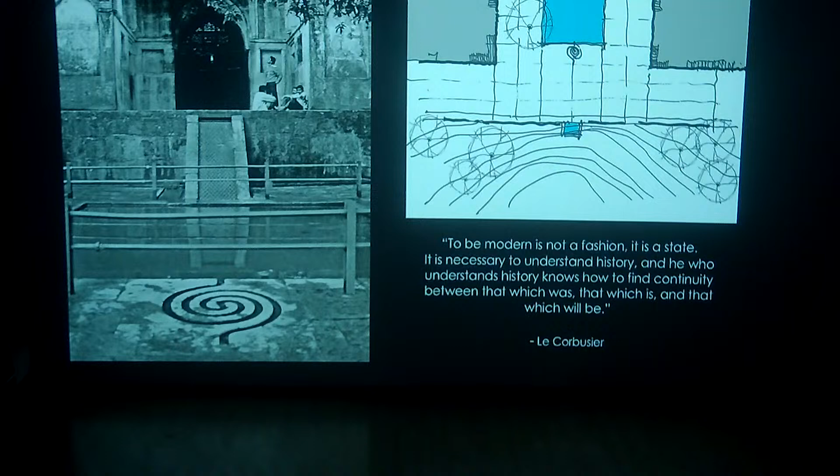This is one of the cases I would like to present, to tell you how a form was decided. I'm going to discuss three different projects. The first is a large mixed-use development, an urban design project called Business Bay and the Ritz-Carlton Hotel - essentially designed as a workplace associated with a 5-star luxury hotel. Then I'll talk about an institute, a precinct within an existing campus - the Indian Institute of Tropical Meteorology. And thirdly, Zostel Panchgani, which was designed by Anubha.

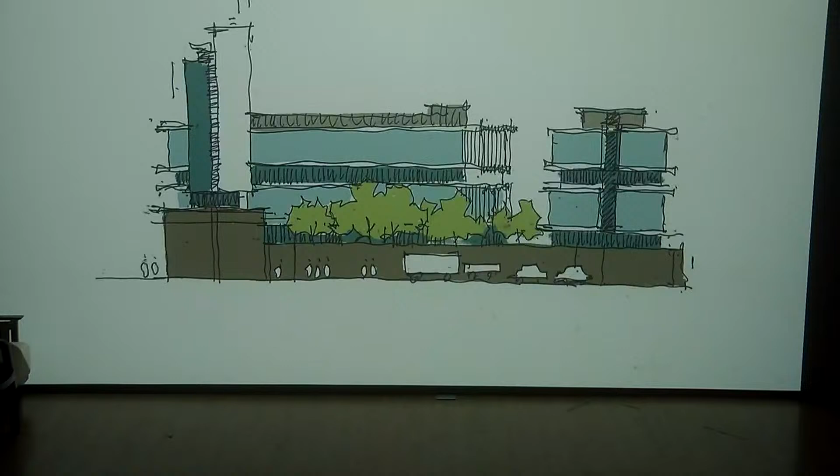Secondly, there was also another important issue: when you're doing such an upmarket workplace, which was supposed to have a very luxurious retail and a luxurious hotel there, the entire footfall here was of a particular economic class. And if you look at the next slide, you'll realize it's situated, surrounded by certain institutional areas, the golf course, and it's juxtaposed with very diverse and contrasting realities of urban life.

And this is a very settled old Yerawada slum and parts of it. So you're actually doing something in the middle of all this context. This can associate with the golf course very much. It can associate with institutional and office buildings very well.

What about this? Normally in the urban design studio, you talk about creating a public realm and create space for people and give it back to the city. But here that notion had to be revisited, because creating a retail which can only survive the economies of this nature had to again be a high-end retail. If I had to put it on the street, or eating places for that matter, which can cater to the working class working in this area, that would have created even greater tension, greater distance between the two socio-economic situations there.

So the response was to remain silent about it, because that's how, as an architect, you can respond to it—not create something just to be a ticking mark of the commonly talked about urban design interventions.

Every time you want to create a public realm, you have to be very conscious about who's the end user of it and what is going to be its social impact. That was another reason one thought a raised podium with a very dead, silent wall could be a better response to that context.

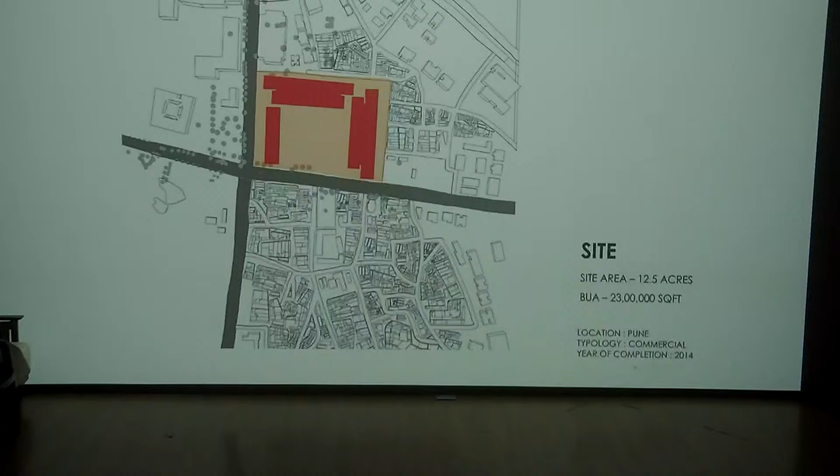But our challenge or our responsibility is the same, when you are asked to design so much, with such a mix of different activities - like the component of hotel was about 6 lakhs, and remaining corporate offices, parking, everything, retail was 17 lakhs.

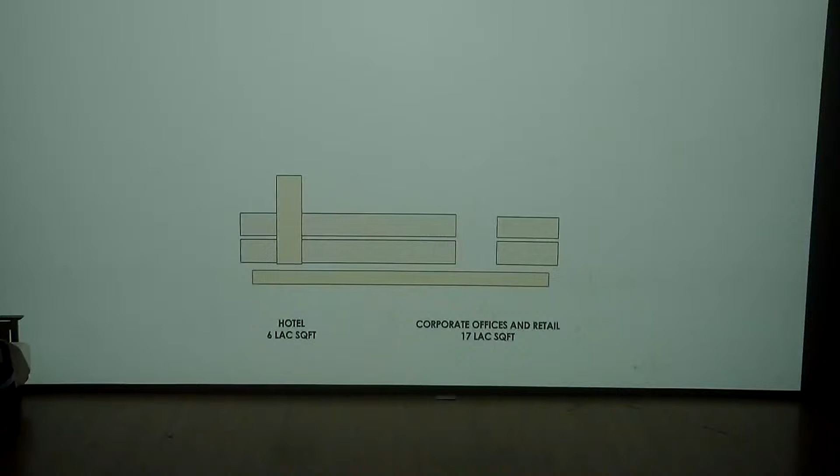So this exercise is the crux of the whole process. Would you like to keep two towers, one as a hotel and this as an office building? That's also a possibility, right? Like what you see in Pune, because the size of plots are like that, you have to go taller in order to achieve the targeted FSI.

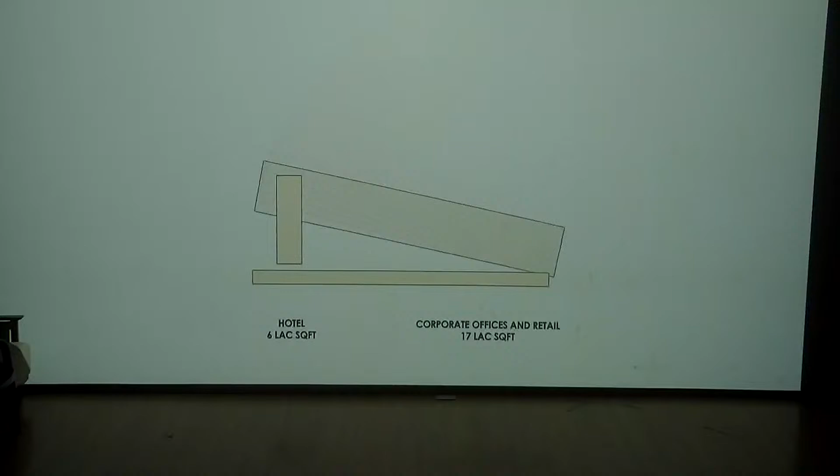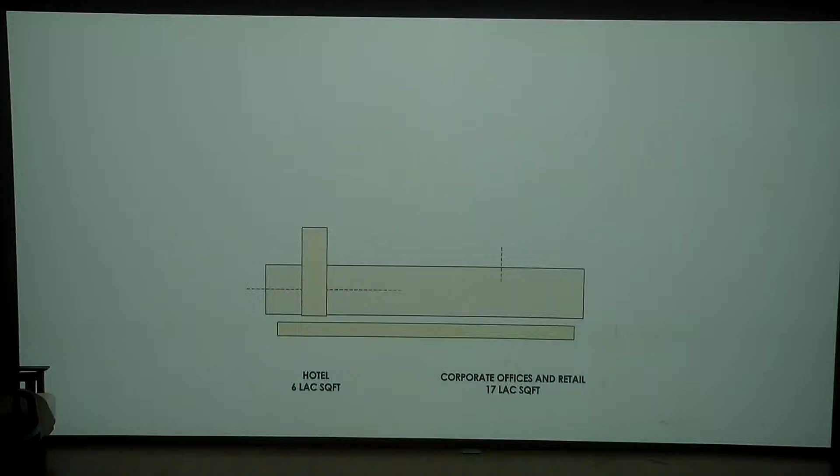But here we took a very conscious decision. The prevailing regulations did not allow us to go beyond certain meters. Then you had airport flying zone restrictions, and most importantly, we wanted to create a place which will look humane instead of intimidating. The landmark can be in two ways - it can just be a tall and very aggressive building, with no limit, just to satisfy the ego of a developer maybe.

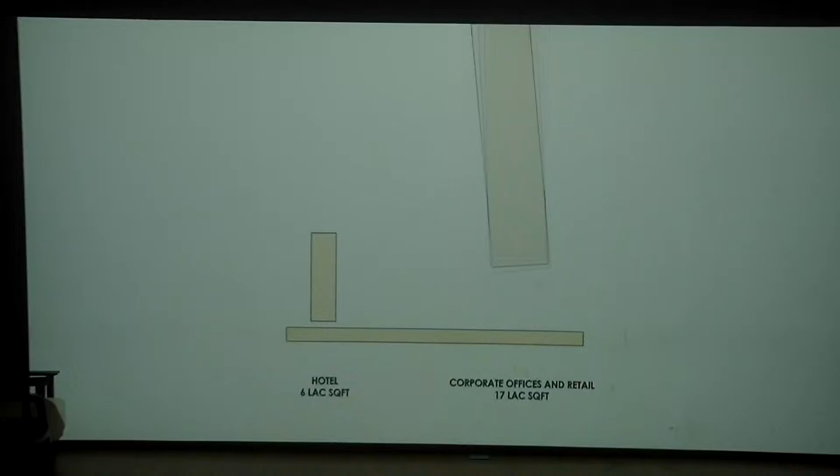But the more sensible way to create a landmark is that it should remain in people's mind - the people who are going to work there and spend their day, whatever 12 hours, 8 hours. So we took a conscious decision to use the same volume in a horizontal manner, so it's very easy on the eye, and it can sort of contain a space.

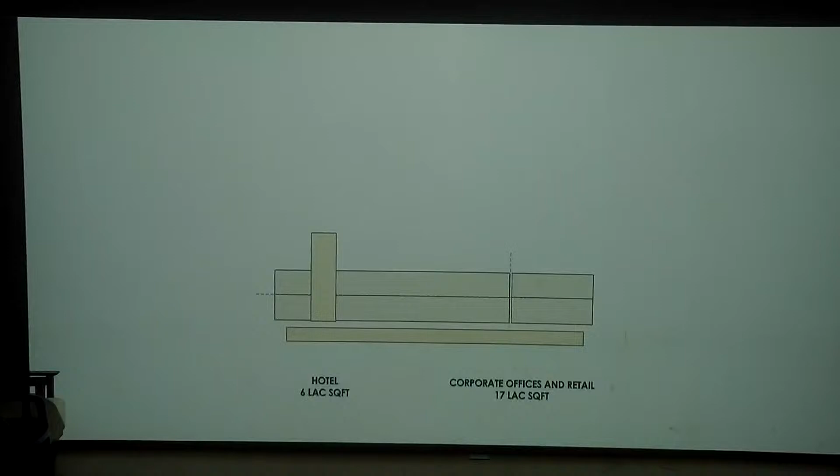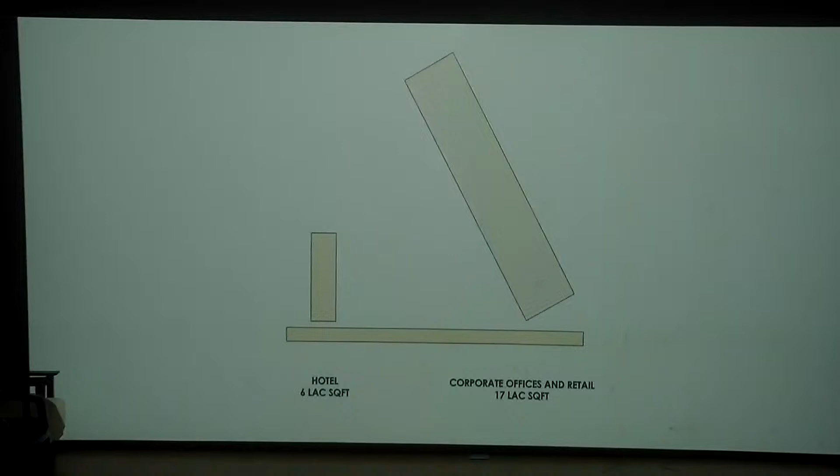Another important agenda was the prominence of the hotel in this entire thing. Actually, if you look at the bulk of these two buildings, the hotel is like one-third of the entire bulk, but finally that was the position the hotel had to take. It had to enjoy that prominence, being that important brand. The workplaces had to be associated with this entire complex, and we wanted them to act as backdrop to the hotel building.

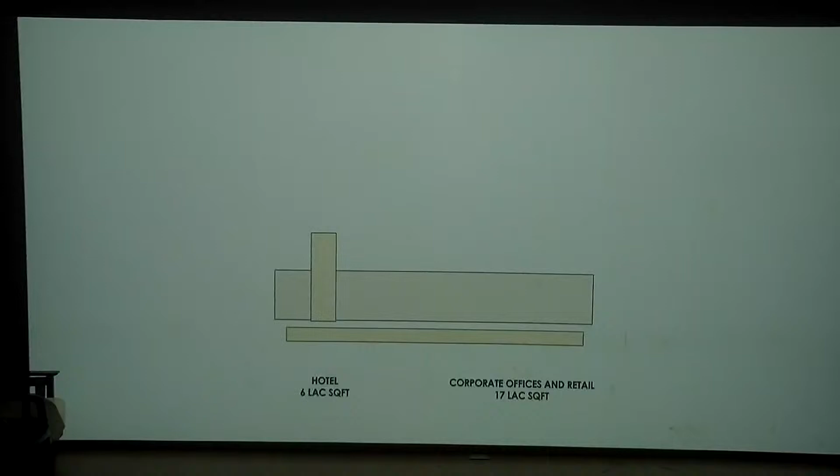You reduce the scale, you give prominence to the hotel, because by its sheer size it's not big enough to create its impact. But by doing the arrangement in a manner that it can achieve everything - that was the task at hand.

And then you start exploring. This exercise is basically about dismantling that.

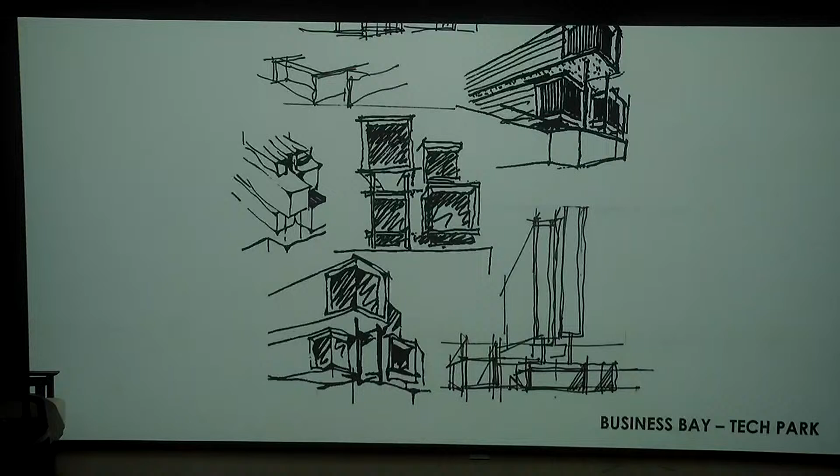And what you can make, and how you can bundle it up, so that the perception about the scale and volume is sort of reduced to a palatable limit.

And then it has to be juxtaposed with a balancing element, like a vertical surface in the form of the hotel eventually. And this was being thought about in 2006.

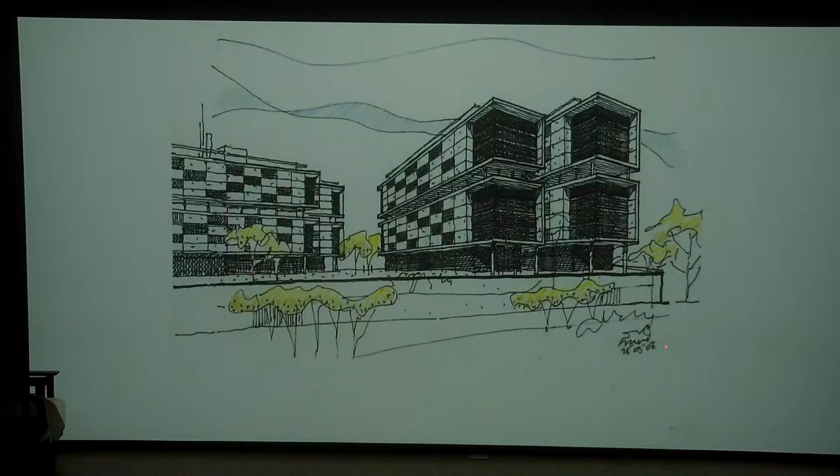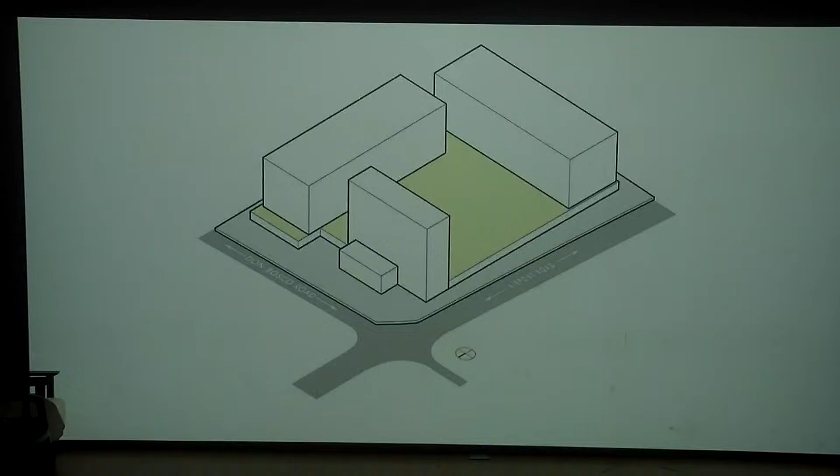The final arrangement is very simple. There's a 4-acre podium landscape garden which binds these three volumes together. These are almost identical offices. There's a plaza and retail planned at the podium level, accessible from the street and in various ways from the parking level.

This is the third level of parking. One level is below ground and two levels are above ground. There's a ramp for the fire engine to access all the buildings. And then, of course, this is a hotel.

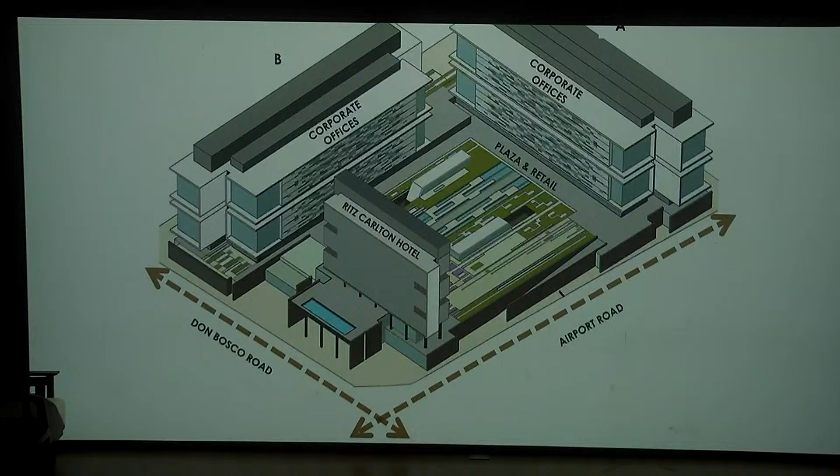I won't dwell too much on the urban design parameters, but in terms of logistics of man and material movement, or vehicular movement, we segregated it into four-wheeler movement and two-wheeler movement. We always talk about conflict between pedestrians and vehicles, but among vehicles there are also categories—heavy vehicles, cars, two-wheelers—so we bifurcated those as well. This render was a result of that.

So this is the 4-acre podium landscape which has a couple of pavilions there, which were supposed to be fine dine pavilions.

Now, hotel, office building, office building. In the earlier sketches you saw, we were trying to bundle up say four floors together to make them look like one entity, so the building looks comprehensible and simple, and you can understand the massing instead of cluttering it with too many possibilities.

And this gap actually provides space for common areas, cafeterias and refuge areas, which becomes very logical for four offices to come down or go up at mid-level and use that common facility, or they can just come for a walk on the podium.

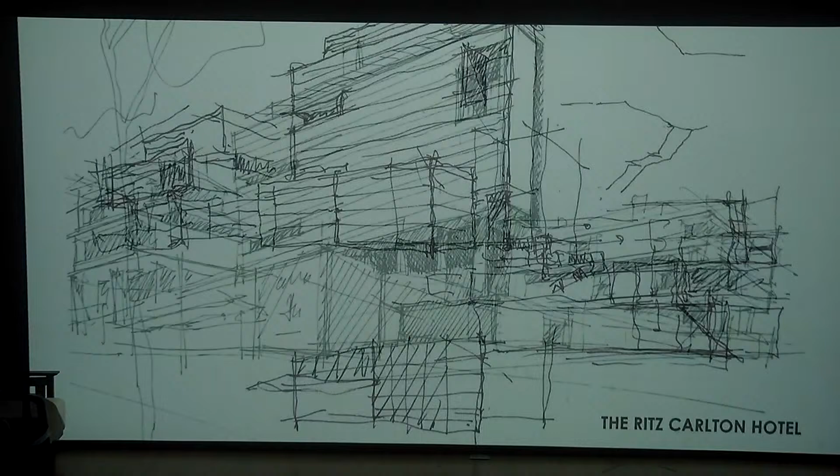Moving on, I split the hotel and the office area separately so you understand. This was part of the same exercise, same flow, but sketches have been presented separately. Here you can see office buildings at the backdrop, and you're exploring how this mass is going to respond. The different arrangement - you can see it's not split yet.

So I was in that process of whether to split it further, stagger it further, and even this had to be staggered. These are scaled down in terms of height, although in terms of sheer building bulk they are thrice this volume. But since this was positioned at the street corner, it was supposed to enjoy that prominence.

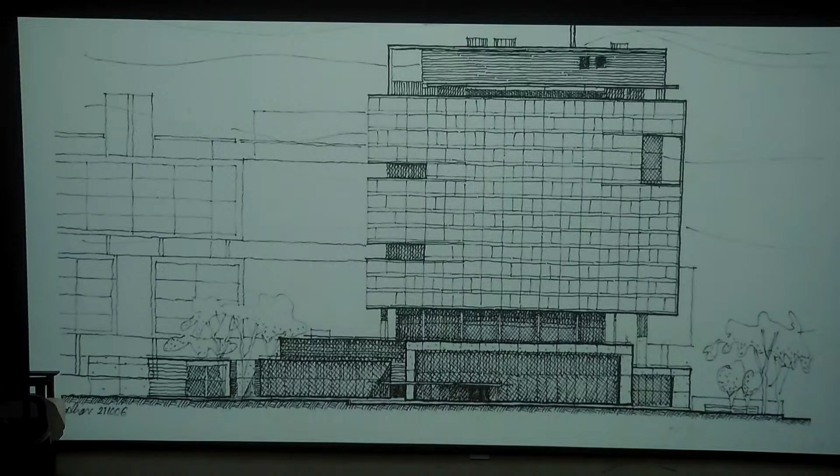Now these are like subconscious or conscious strategies just to balance these lines, juxtaposing them in that overall composition of volumes and masses.

There is a legibility about this form. All these are public areas, and from here you start the guest floors. Material-wise also, there are some MEP areas at the top, but these areas are articulated according to their functional requirement and the connect with the outdoors. Numerous interfaces of different materials and elements come together, and everything has to be resolved in a manner that it looks complete.

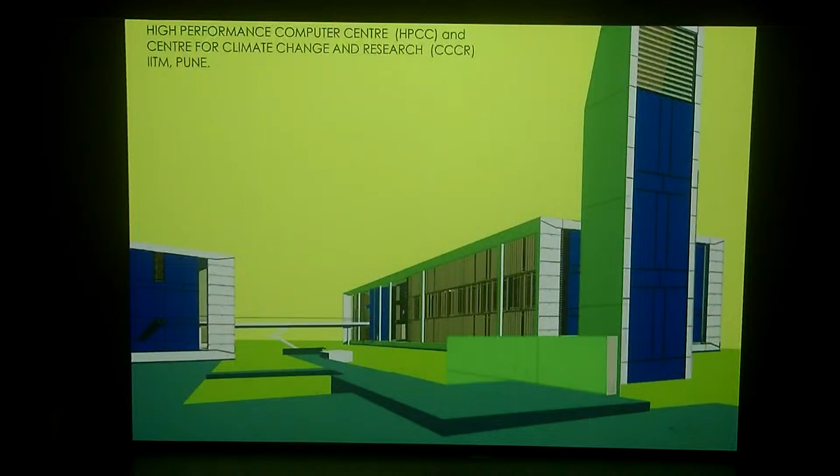Now, I know Kanchan ma'am mentioned about this project: High Performance Computer Center and Center for Climate Change and Research at Indian Institute of Tropical Meteorology, Pune. Here we realized we were supposed to do a master plan for this 50-acre campus, but the master plan was more about infrastructural corrections and facilitating future growth. We were also supposed to design two buildings, which we looked at as a precinct within the existing campus, and that's how the title was coined.

This is like a second-year climatology textbook, everybody has it. When I talk about history, like what Corbusier mentioned, history is this as well, because your understanding about staying in an old mud house in some village, because it has thermal mass, you feel comfortable, you feel warm in winter. A courtyard house facilitates wind movements. All these learnings, I refer to as a history of your learning basically, and there was an opportunity to deploy all that understanding into a project.

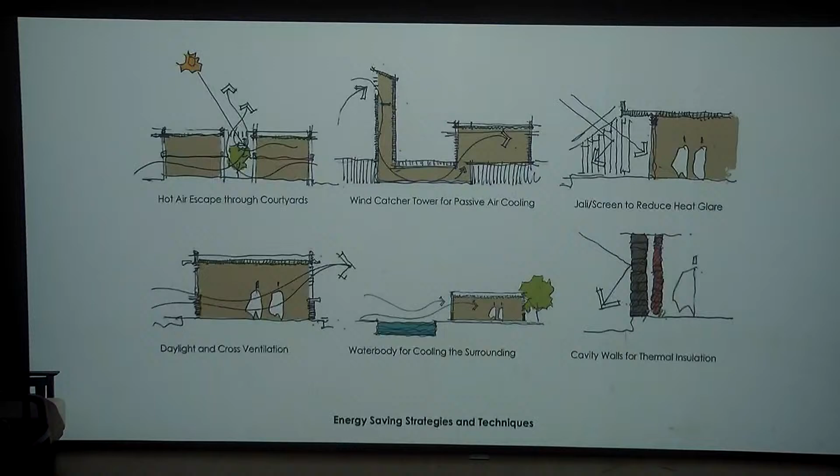A climate consideration or climate-responsive architecture leads to determination of a form, that's another way to approach a form. You don't preconceive it, and the simplest solution could be a simple rectangle if you understand the sun path movement, and probably you would want to respond in the least invasive manner as possible, invasive in the sense of what's around in the context. Here we were lucky to have a very large empty plot, so we could have taken any shape we wanted. Instead of doing self-shading volumes of a close-knit fabric, we decided to deploy certain elements on the envelope of the building to reduce the heat gain.

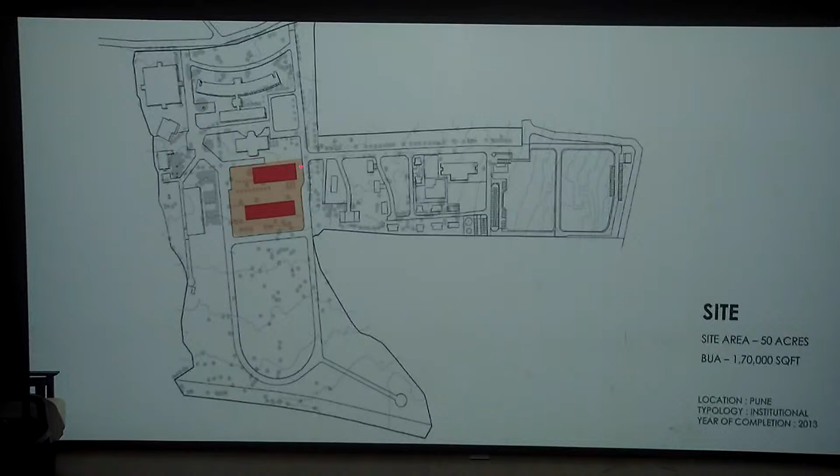So anyway, this was a campus. We did some infrastructural road networks and all that. This is a residential campus. We decided to have two more residential clusters, and then of course this institutional precinct for two new buildings. This was the premise on which the entire architecture was set forth. To me, this is the way everybody should adopt, come what may. The project objectives are that you have to respond to the climate and come up with interesting possibilities.

So here we summarized what this project is all about. I hope you can read it, or let me run through it. The building design of HPCC and CCCR is synthesized from four considerations: converging the formal vocabulary with that of passive climate control. When talking about vocabulary, you are referring to the ultimate expression with respect to its form and architecture, expressing the functional duality as two separate yet unified blocks, because each of these buildings had two distinct functions. One had to be the office areas or research areas, the other a place for housing a supercomputer. Both buildings have similar requirements, but executed for different entities, the different research groups within the institute.

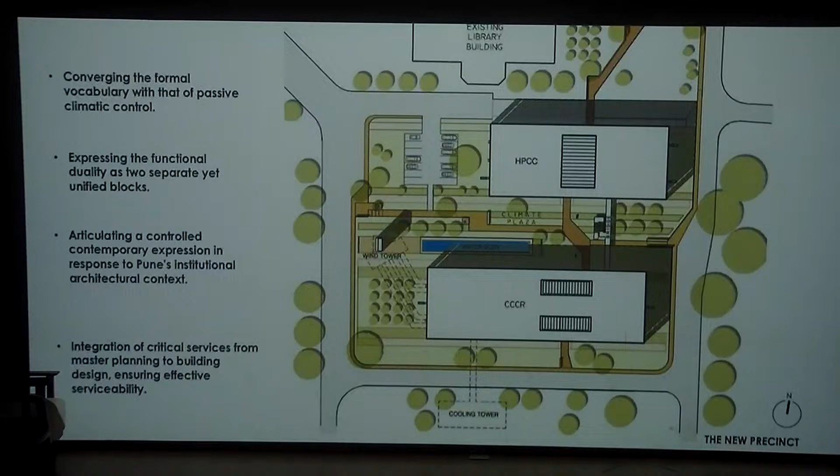Plan the service in a manner that it can be serviceable in times to come. And this building has proven that approach. A 75 teraflop computer hardware was replaced after a few years by some huge capability racks without breaking a single wall. So that redundancy, that planning, that serviceability was designed into the building. And when you call a building institutional, these buildings are supposed to live longer compared to commercial buildings, and they are going to adapt to different, changing requirements. So form is about achieving all that as well.

This is just to continue what Kanchan ma'am must have said, about how to reduce the heat gain by landscaping. So you have to talk about the unbuilt spaces in between, how they need to be looked at also.

Plans are very simple - the courtyards or the arrival. So in this building we realize, on a campus, that a building does not necessarily need to have a front elevation, rear elevation, and side elevation. Because on a campus like this, you can approach the building from any direction.

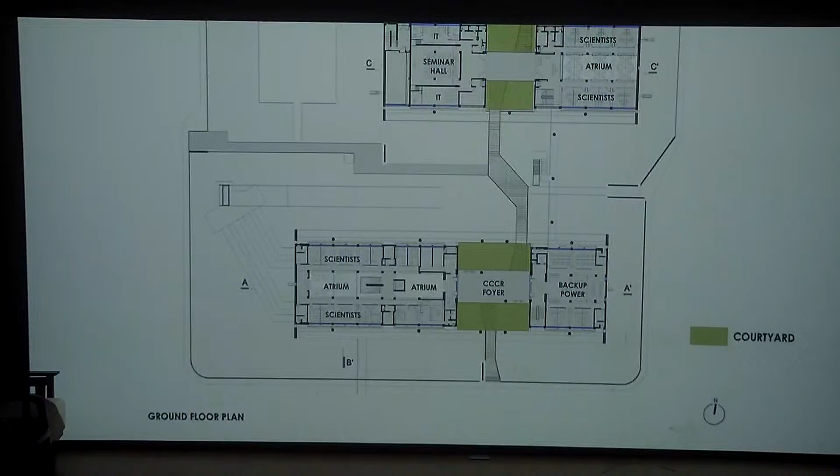If you are coming in from the residential side, you would come from whichever side you are. So the elevation, or the facades, whatever you call it, they have to respond to the climate and which direction it is facing. So here what we did is a simple strategy of adopting a rectangular form in order to reduce heat gain. Why rectangle and why not square? Because a rectangle can give you two shorter sides and two longer sides, and the two shorter sides will be more appropriately oriented towards east and west to reduce heat gain.

The radiation of sun is maximum from east and west, and therefore you want to create shorter walls, and that's how the form started shaping. And then furthermore you can make them cavity walls, add some less usable support areas like toilet blocks, storerooms, and create a thermal buffer to protect the main usable areas.

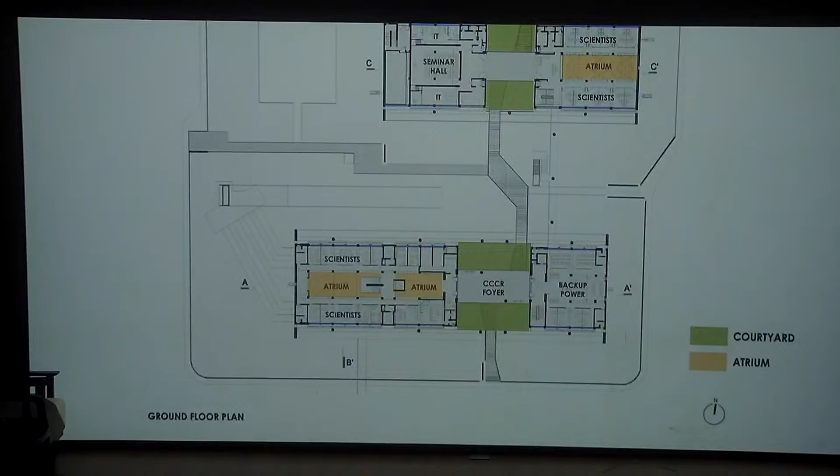So a very simple strategy. If you look at the plan, there is absolute legibility about the entire thing - what's happening. You can understand which are the servant spaces and which are the served spaces, as Louis Kahn would say. And there's an atrium to facilitate cross ventilation.

And these are all the elements which go on the building, created to shade the building facade in order to reduce the heat gain.

One of the buildings we actually also installed with radiant cooling, which was mentioned in the earlier presentation. It has got all the parameters, all the characteristics of solar passive architecture with respect to shading device, orientation and shape. But in addition, we had also deployed what is called radiant cooling and an earth tunnel system in order to supply fresh air.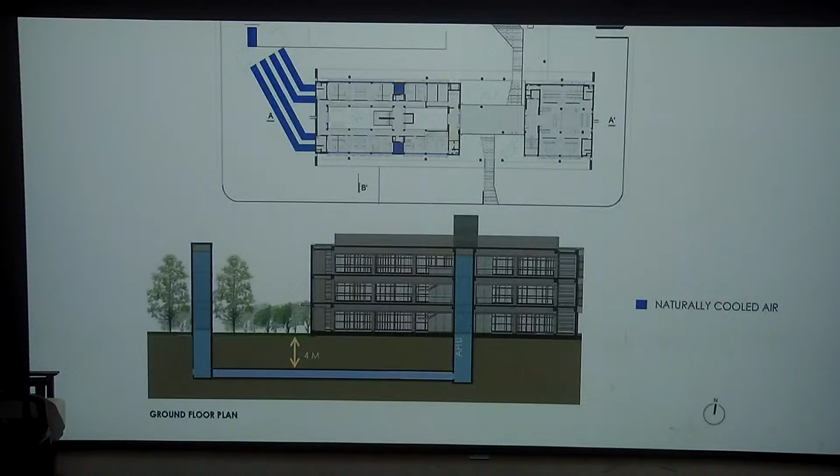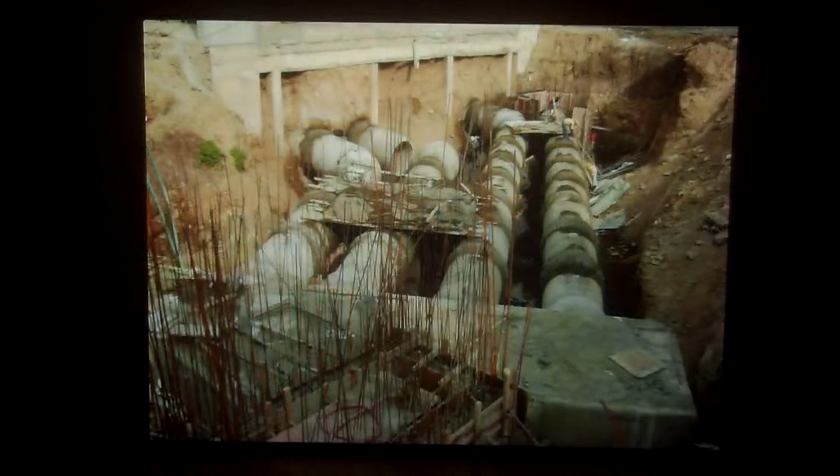And this is how the pre-cooled air is pushed into office areas. So I won't dwell too much on how it is designed. These are radiant cooling pipes embedded into the slabs.

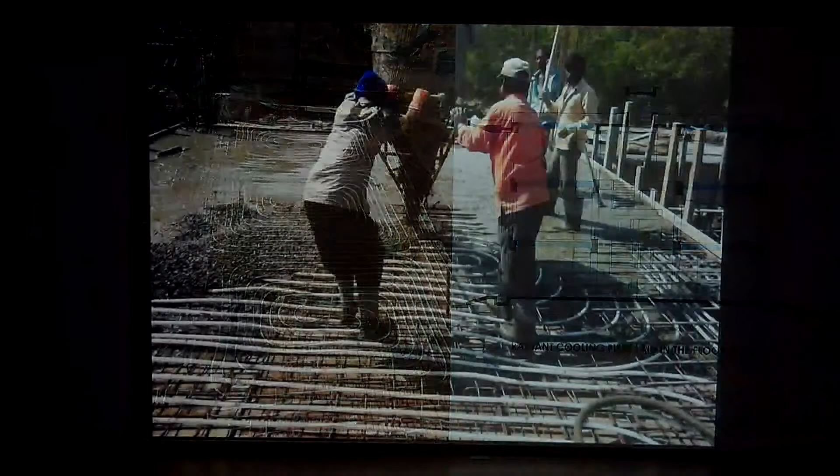It's not about just one building creating a spatial experience. It's about the campus. So this idea about form escalates and becomes even more complex and dynamic when you're dealing with a campus situation.

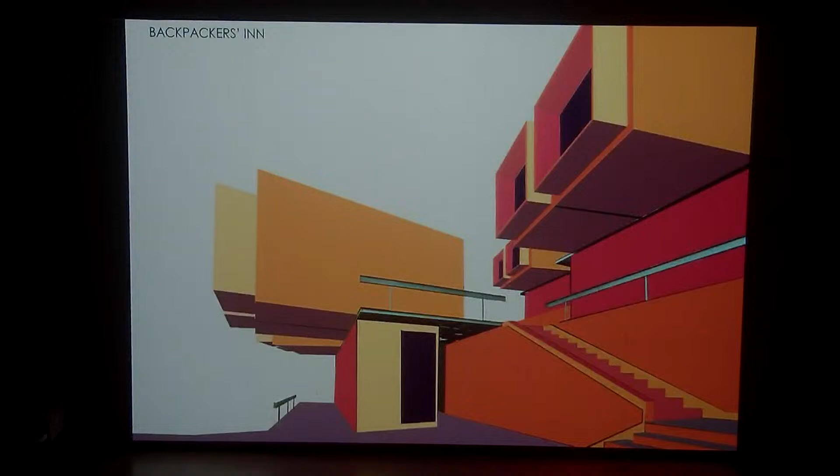Every project we try to capture in a one-liner. Earlier you saw 'present in the campus,' earlier 'urban workplace.' Now this is going to be 'cascading energy.' Cascading energy means it's about the youth, and cascading implies it's on a physical terrain that has cascading possibilities—so it has metaphoric references as well.

The users, the millennials, really live that notion here. It's part of an existing village fabric, like a gram panchayat area, and that's how they could get some sort of permission to build there. There are some existing quasi-permanent structures, hotels, and then this was proposed there.

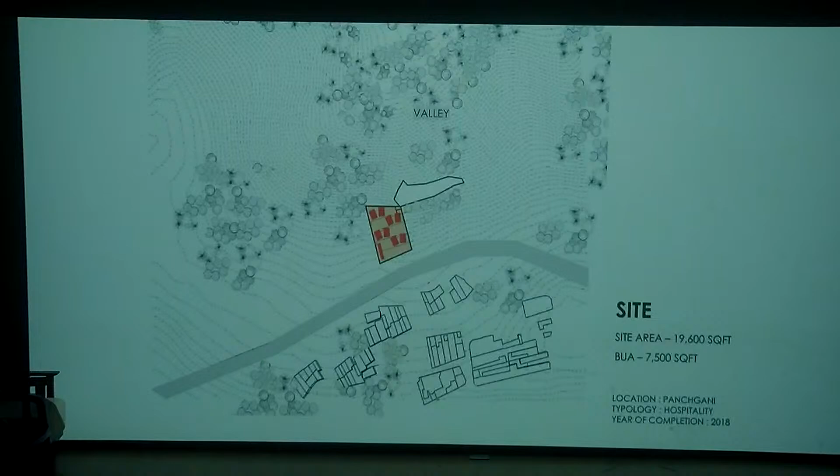If you look at the fabric of this, it's all smaller components—very fine grain, low rise. Materiality-wise, it's patra (sheet metal) walls and patra roofs particularly, and in our intervention we are continuing the same character of the built form into the new campus.

You must have noticed the contours in the entire region—it's all paddy fields. We deliberately took a black and white picture here because we wanted to focus on the position of the site. But this landform was something of great importance, and ultimately you had to intervene into that kind of geography.

You see similar geographies in the world, and in India too, where human intervention using non-mechanized tools and implements results in scales that are very humane—terraces that are maybe 7 or 8 feet high maximum. This is the way to create usable terraces that can be cultivated. These learnings, this history of how humans have intervened into the landform, comes as one of the possibilities on the design board.

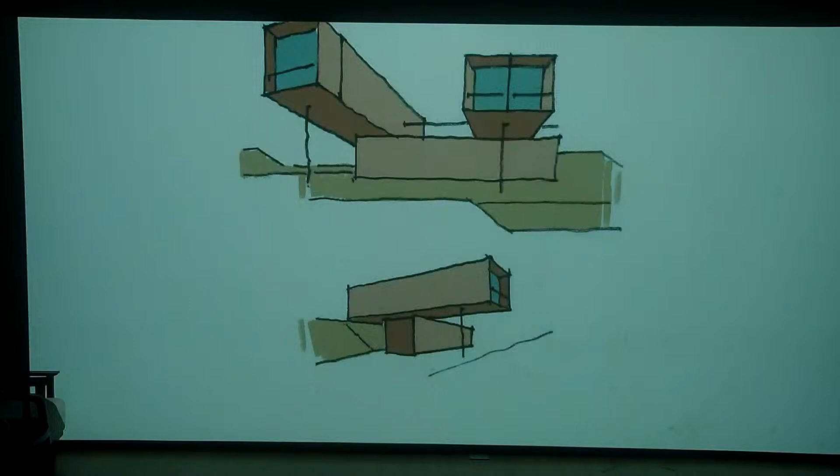Possibilities started coming in. You have to stack it up, make it balance, stabilize them, and still make it interesting and livable, not to forget the views which are in abundance in the valley. Although you don't see the backwaters there, you see a wonderful play of shadows of the clouds, birds flying by, seasons changing, skyscapes, and different qualities of light during the day and seasons. You can see rain coming from one direction and going away in another. The entire valley view is full of dynamics, something is happening, and you really don't want to miss any of those situations.

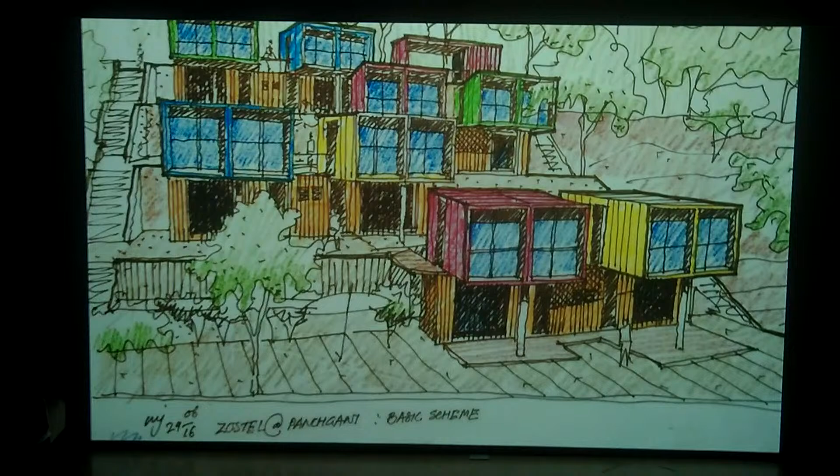So everybody deserved to have that view. That was another challenge, and then some of these explorations happened.

Going back to the paddy field strategy, you create terraces, and in a ghat like this you never negotiate it in a straight line, you have to come in a winding manner. During that process, as you're taking the ghat, you're exposed to different positions and views, so it's not boring. You have a very dynamic serial vision experience, and we wanted to create that as well.

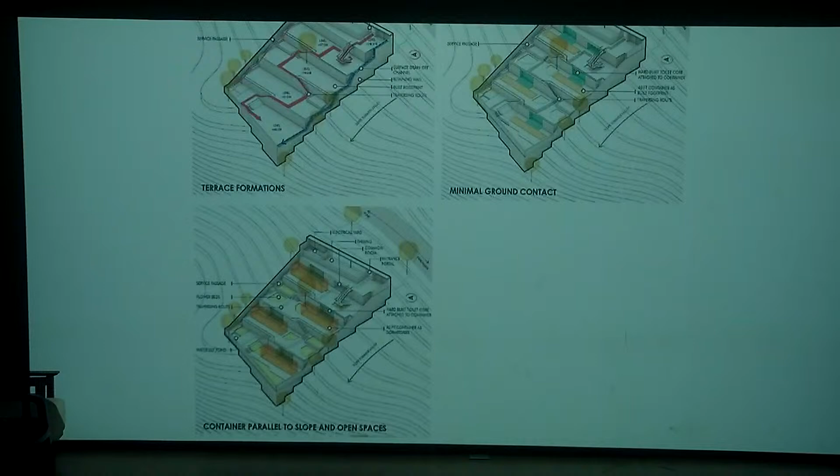Create footprints where narrow and long containers can be housed, with just enough space in front of them. Likewise, then put more containers on top of it. So this was the whole strategy of how the form came about.

You can traverse in between these areas, and in the process, when you take a turn and come down walking in this direction, by design you get a view through these two containers, so you don't feel claustrophobic within these spaces. These spaces, which are not actually built upon, are the soul of this entire experience. The unbuilt actually defines the built, because these are the places from where you get to experience what's around you. These are the places where you just throw your rucksack, come down with your guitars or whatever, campfire time. So these spaces are the very living rooms of that entire place.

So in a project, normally there are listed spaces, but there are also non-listed or non-programmatic spaces. As a designer, you have to see through those possibilities as well - areas which ought to be there but are not listed as something to be built.

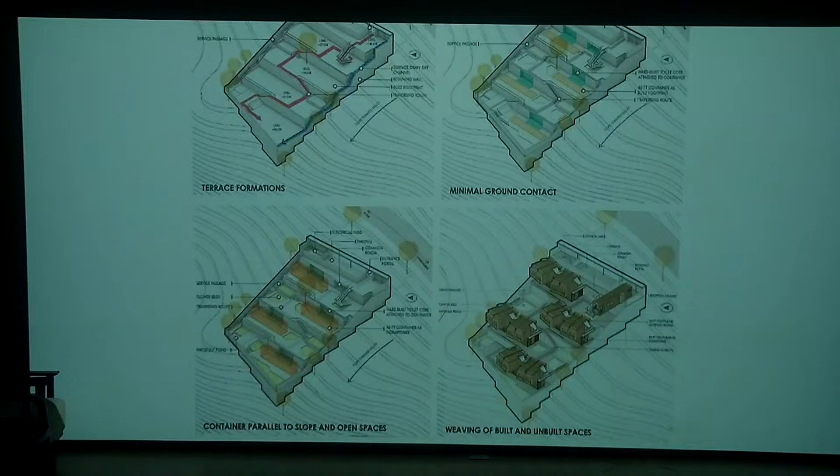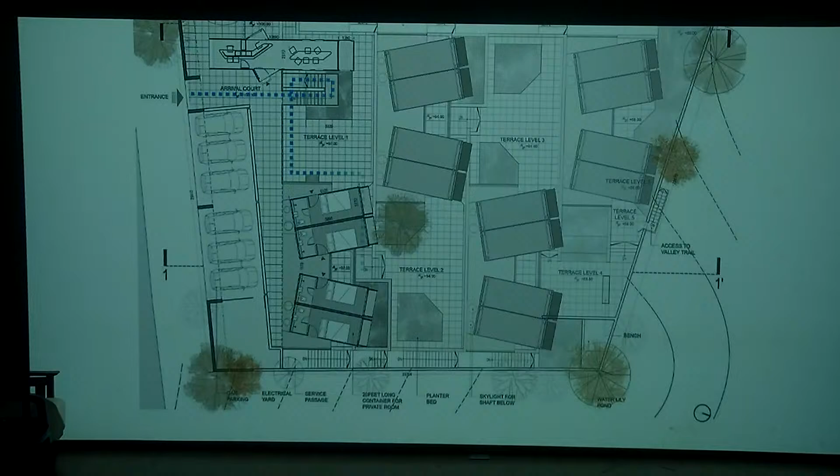This is how you unfold the plan. This is an entry from the roadside, this is one pavilion which is a reception pavilion, and coming down is a common area. We had to construct this one slab to make this whole thing possible, and then make terraces. There are a few existing trees we had to respect. Everyone gets the view.

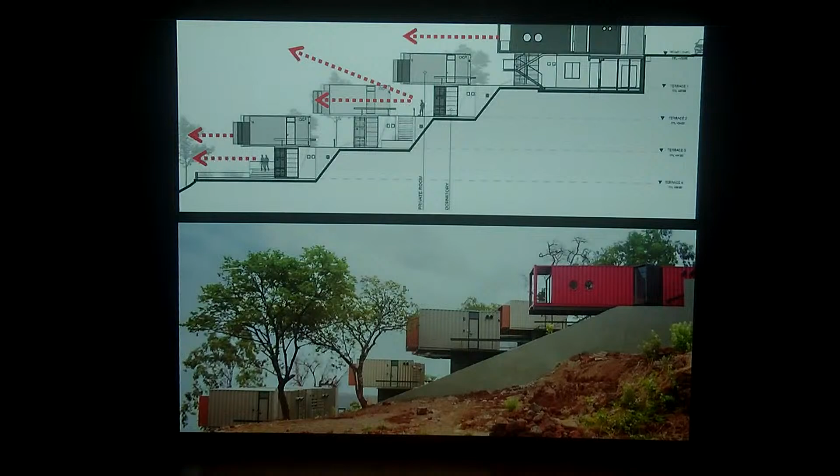Now something else - when this was installed and up and running, we did not find a solution to provide a weather shade to the door. We tried all the possibilities, but nothing came to mind that was going to work, and we didn't want to do a huge fabricated contraption there because it would have been very heavy. It's physically not possible to attach a metal structure onto this.

Then we decided, after discussing a lot, that since we're using all the materials and products used in the transportation industry, like containers, and also using the graphics the way a transporter would, the idea came to use a tadpatri to make a canopy out of it. It's like a cap, made out of a tadpatri or some Teflon kind of fabric. It's a very simple pipe structure that's hooked onto that area, and that was added later on, and it works fine.

These are the private rooms on the top. These are the dormitories for 6 persons each. There are 2 dormitories within this box. This is for 2 people, with some standout balcony.